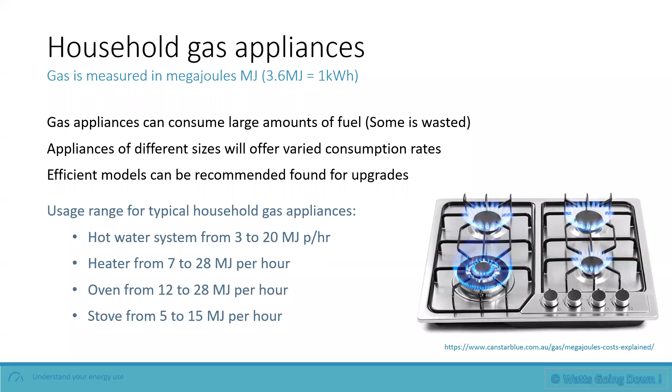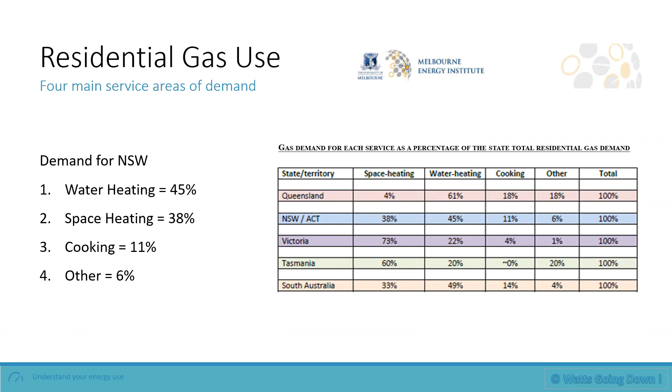When we look at the main energy use in homes, what the breakdown is cost-wise, for instance, if you're using gas for numerous things, it tends to be in New South Wales about 45% of the energy being used in homes for gas is for water heating, about 38% gas used for space heating, 11% for cooking, and 6% for others.

So my advice is if you're going to make a bit of an effort to try and be energy efficient, part of what you can do is to actually jot down some of your energy use and start to work out which are the priorities, which are the things that are mostly going to be costing you money. So itemize some of those things and identify the things where there's the biggest saving.

Now, of course, pretty straightforward - you can change a really big appliance and there'll be some savings there. But if it's not something that you're able to change, or you can't afford to change, then you've got to be looking around and really having an idea of which are the ones that are costing you the most - that's a really good place to start.

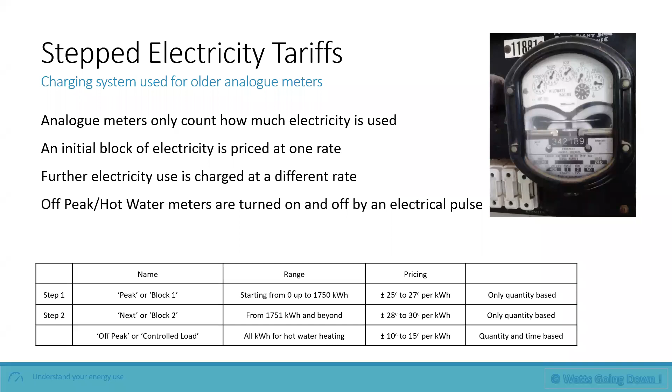But your actual electricity bill should tell you, and there'll be certain names given to the tariffs. Often peak or block 1, and next or block 2, is what's used on those simple kind of tariffs under that simple charging system. But there's a more complicated system that's come in since we've had digital meters, and it's a little more complicated - not greatly complicated.

So what happens is you've now got these digital meters. Sometimes they call them smart meters - often they're capable of being smart, but they're not really smart. They're just electronic meters rather than an analog meter. They do have the potential to record more information. So what they do is not only count electricity as it comes in, they're counting what time it's coming in and what time it's starting and stopping, that kind of thing.

The reason being is that all across Australia, we have a particular energy cycle from one day to the next. For domestic homes, there's a bit of a rise in the mornings as people get up and get ready for school and work. It dips down a little in the middle of the day, and then it rises again in the evening around dinner time, and then it drops off again by about 10 o'clock at night.

So the electricity companies, now that they're all privatized, buy their electricity off the wholesale market. And at some times of the day, the market price of electricity is very high. So rather than averaging out all the electricity and just charging you one or two blocks, these time of use tariffs have come in, because the energy companies are gradually going to move those higher cost periods onto us as consumers. And that's what's going on.

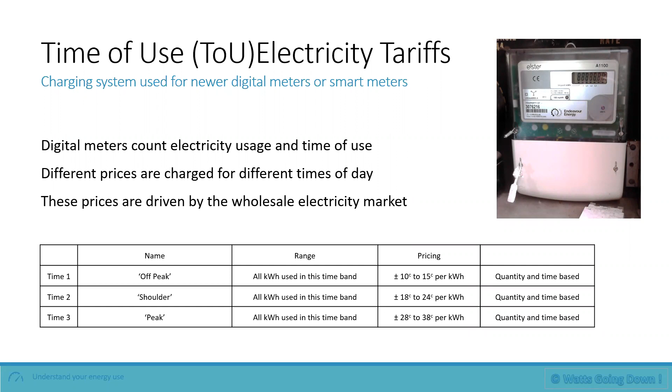But that period where we get home at the end of the day and then start to fire up our cooking and prepare for the next day, that's when the energy demand is at its highest in the electricity market. And so that's when the prices are high.

It's worth having a look at your retailer and your bill to work out what type of tariffs you're on. Are you on the standard block tariffs, or are you on time of use tariffs?

The NMI is the National Metering Identifier. It's like an address for your electricity, recorded as a unique electricity address number. So if you're going to change from one company to another, they need that number.

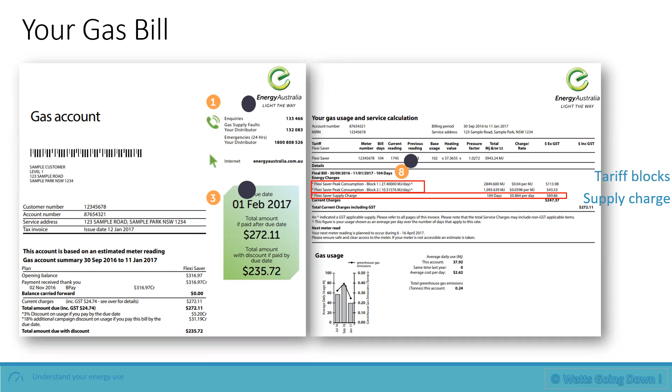There's a number of tariff blocks. Some companies that are retailing gas will reward you for using more, others will penalize you for using more. It just depends on who you've signed up with. It's sold based on the number of megajoules that you use over a billing period.

MIRN is the ID of a particular number for your meter, and that's the number you'd need if you're going to change your supply with someone else. And again, billing period - in this instance, 30th September all the way through to the 11th of January, a fairly lengthy period, 104 days.

Again, average usage - that's the figure I'm really interested in, how much you actually are using on average over that quarter. And of course, we would expect there to be a big difference from summer to winter. We take longer showers in winter and use more hot water. If it's cold, we're going to be running a gas heater more frequently.

There's nothing like cooking up a big warm dinner on a winter's evening compared to summer, where you might just want something light, maybe an extra drink and a bit of salad. There's a lot more energy used when it comes to gas in the winter months.

And then there's also plan names - what do they actually describe about the plan you're on? So all those things are on the bill, including discounts. It is kind of worth your while spending a bit of time getting to know them. I've looked at these for a long time, electricity bills, but I've got to say there are times where I'm bamboozled by things, especially when they change the tariffs and they change the names.

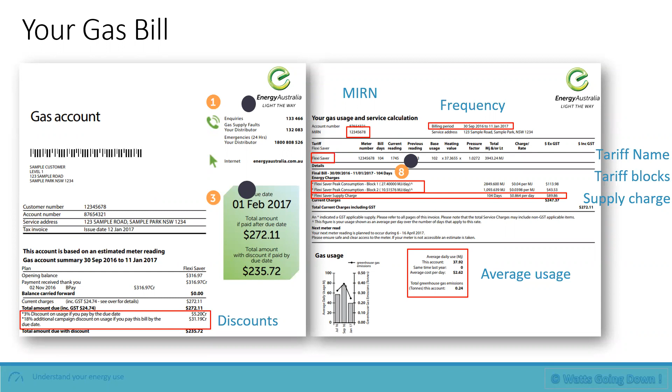But it is beneficial when you're renting to really keep a bit of a track on your energy use. There's a great tool when it comes to looking around for the best energy plan, and it really is the only tool I would recommend to you. This is a government website, it's called Energy Made Easy.

You need some information off your electricity bills, like your average usage is really good information, your postcode, those kind of things. You can look up electricity, you can look up gas, you can look up a combination of the two bundled together.

My advice is, if you've been with the same company for a long time, you really want to be keeping them on their toes, so shop around regularly. Otherwise, they'll hang on to you as a customer and the prices continue to jack up. Shop around, move from company to company if you get a better deal.

And this website enables you to actually search through a series of plans. Once you look through those plans, you'll be able to actually see what plan you're on, and you'll see what other plans are available to you, which may be cheaper, or probably are going to be cheaper unless you've been doing this exercise regularly.

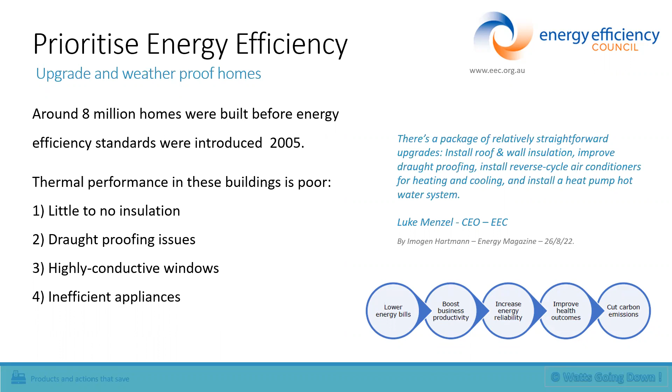So there's a package of things the Energy Efficiency Council recommends, which is about treating the home, draught proofing, and upgrading a whole bunch of appliances. Well, that's good, but there are simple things that you can do.

Skylight, vents, downlights, cracks around the window frames and the floor. There's lots of ways in which the energy that we pay for to either keep cool or keep warm is actually just seeping out through gaps and cracks. And so we reckon draught proofing is actually a really beneficial thing to look at.

That means the devices that you're paying for to put heat or cool into your home aren't going to have to run as hard. They reckon if you can make a bit of an effort, there can be some pretty significant savings, as much as 25 to 50% for average electricity use. You can save yourself $180 to $360 just by being really careful with this stuff. And for gas too, there's some pretty good savings.

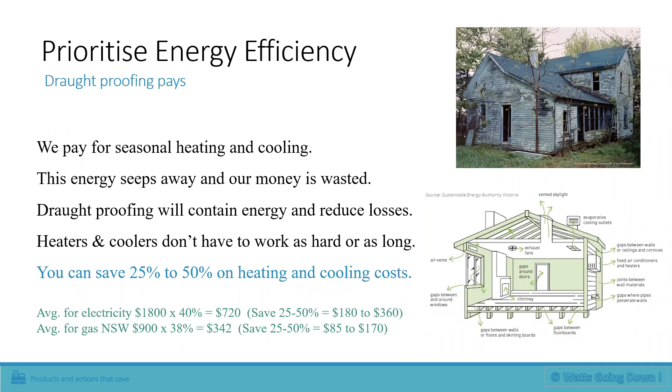So let's go down the path of seeing what are the main energy use areas that we use, particularly with electricity. Heating and cooling is the big player, 40%. Water heating, 23%, and that does change a little bit from place to place. These are just averages as determined by the energy rating website, a government website. Fridges and freezers now take position number 4, that used to be number 3.

Other appliances, we now have lots of gadgets in our home. There's ways that we can improve their performance. Lighting has stepped back a little bit, it used to be about 10%. Cooking sits around 5%, that's not a big use area but there's still some improvements to be made. And standby power, that used to be about 10% too. So we've seen some improvements.

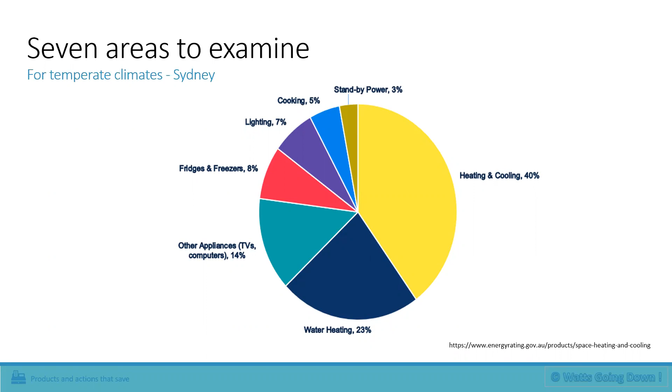But in today's homes, they just don't build those kind of vents into the walls. So my advice to you is block them off and manage the air by managing a window or a fan, or an exhaust fan or something. You don't really want a permanently leaky hole in the wall. What you want is a mechanism that you can control.

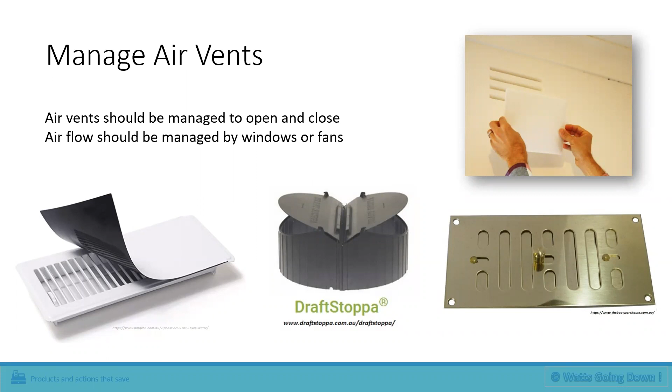And of course, there's a lovely shiny brass one there, just one of those wall plates. That particular image actually came from a boating shop. But you get the idea, there's a little slider along there so you can open and close the vent. So managing air vents is important.

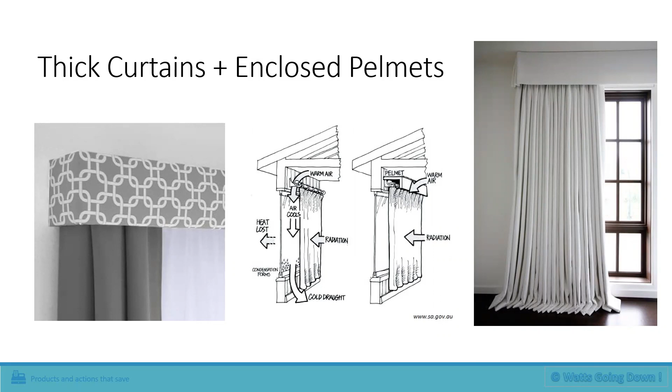This is probably a treatment you'd consider more in winter, or on a cold night. We do occasionally get a cold night, but we're experiencing the first serious amounts of spring, aren't we? Let's talk about something you might do to the glass.

If you've got windows that are taking in a lot of heat, you can use these kinds of temporary treatments. Some people use bubble wrap. What is bubble wrap? It's trapped pockets of air, and that's actually what insulation is. But you've got to really enjoy that funky look of having bubble wrap on your windows - it's not going to work for everyone, is it?

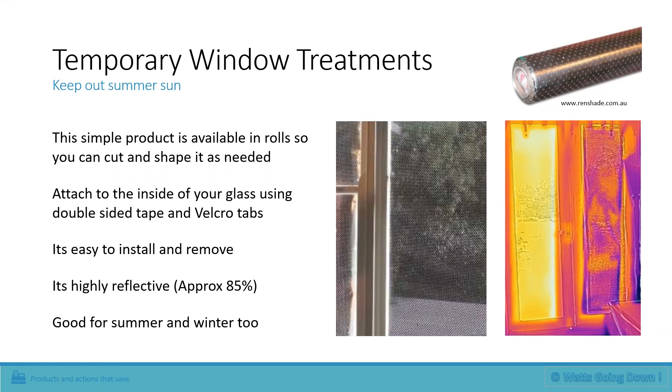So insofar as managing heat traveling into your home, without a doubt, treating the outside of your home with some sort of shading is the big success story. You can do a lot with curtains, but effectively the sunlight pours through the glass, heats the back of the curtain and it becomes a radiator. But if you can arrest that sun on the outside, then you're going to make an enormous difference to the amount of heat that's pouring in.

We tend to forget that the morning sun in summer has just as much energy in it as the afternoon sun in summer. So we don't tend to pay a lot of attention to the east-facing windows in our homes, but that's because the mornings tend to be a little cooler. It's been cooler overnight, a lot of heat's dissipated, and that sun starts baking up our houses on the east side. Throughout the middle of the day the sun's directly overhead, and in the afternoons the environment's hot, so we really notice that summer sun. But it's the same amount of energy pouring in morning and evening.

Every 1 square meter of glass represents the same energy as a 1 kilowatt heater. So if you've got a couple of windows facing east, then you're letting in a couple of kilowatts worth of heat when the sun's coming through them.

Now, there's a lot of products on the market, things that can be fastened to buildings, and that may or may not be possible when you're renting. But I've seen people who are quite innovative, who've gathered some secondhand fly screens and actually taken the fly screen mesh out of them and put shade cloth in their place, then fastened them onto the windows, saving the original mesh to put back up in the other months. That way they've got shade cloth fastened into the fly screen. I think that's really clever.

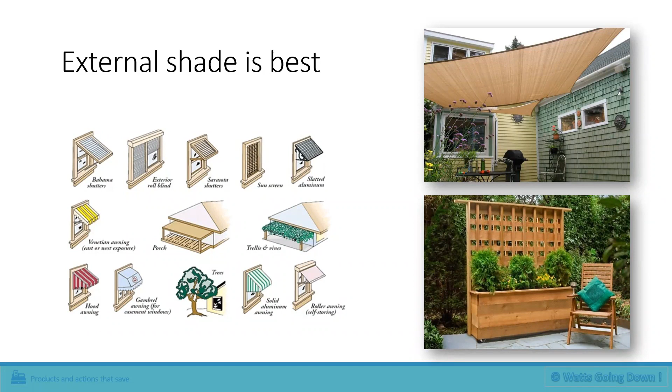And the other thing, I've got a picture down the bottom right-hand corner, showing that with a little bit of creative thinking, a garden planter with a bit of lattice at the back could act as a great way of stopping the sun from pouring into a window while still enabling you to see out. Perhaps you can even make good use of that little garden planter and put some, what are now expensive vegetables, tomatoes or beans or cucumbers, in your planter box, and make use of that sun, grow some vegetables as well as stop the sun from pouring into your house.

When we talk about gadgets or appliances that you might use, what we know across all the different devices is that the most efficient device you can put into a home for cooling is a reverse cycle air conditioner. Now, there are lots of little temporary, portable ones you can buy, but unfortunately they're not as efficient as the fixed split systems that are on the market now.

Compare that to something like a fan. Fans use a trivial amount of power by comparison. What actually happens when we get hot is that our bodies will put moisture on the surface of our skin, we perspire, and when air blows across the skin, that moisture evaporates away and that leaves our skin feeling cool. That's really what air conditioners do.

They kind of mimic that effect by extracting the moisture out of the air, so you dry out when you've got air conditioners. But air conditioners are great in that humid part of the year, and we've certainly had a couple of humid summers, haven't we, with all the mold and everything else that's come into our homes in the last couple of years. Supposedly we're expecting a bit more of that this year.

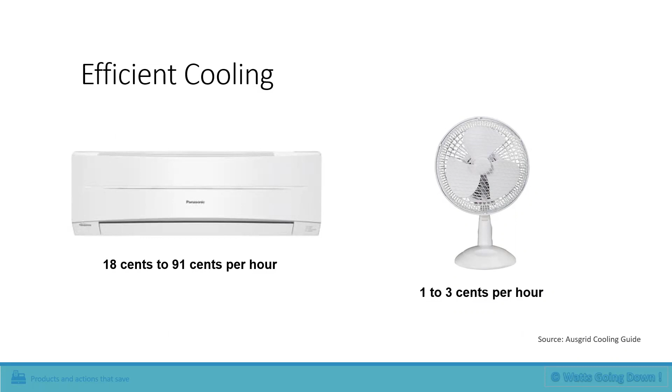There are some great simple heating habits you can use. The first one we call zoning, and that's just about closing off the rooms that you don't need. It's kind of common sense, isn't it? We're not using the spare bedroom, we're not using the bathroom or the laundry, so we just close those doors and treat the rooms that we do need to, either for heating or cooling. That works in both ends of the seasons.

Sometimes people get really innovative and install little curtain rods, systems you can put up into a doorway or hallway, so you can actually block rooms off and hang a curtain down. They're just little rods that you twist in your hands and they expand out until they meet the walls, holding steady to hold a curtain without necessarily doing any penetrations into the building. So that's an idea - closing the doors and only treating the rooms that you actually need to treat. The smaller the space you're treating, the less money you'll spend.

Temperatures are really, really important. These figures might seem counterintuitive - you might say, hang on, you got those numbers in the wrong place. Actually no, these are the recommended settings, and I'll explain why. We encourage you not to heat your house up too much in winter, 18 to 21 degrees. By the time you get to 21 degrees, that's pretty comfortable, yeah? 18 degrees might seem a little cool, but as winter progresses and our blood thickens up, you can actually afford to step your temperature setting down a degree, because your body's kind of acclimatizing to the winter.

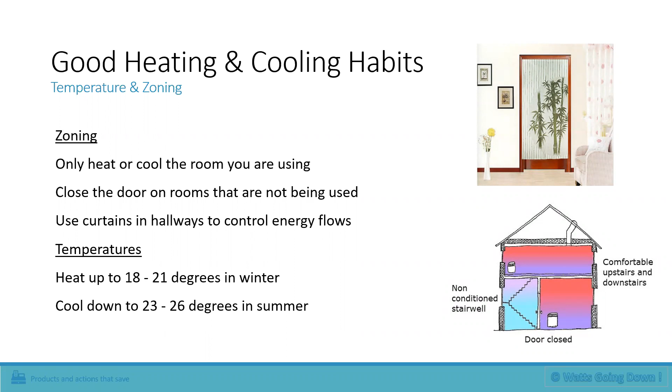So it's worthwhile to really look at those temperatures. Now, it's not a prescription, and everybody and their bodies and their needs are different. But that's the recommended advice, and you just work out what range is good for you. Of course, if you can manage it, changing it by 1 degree is going to help.

I'll quickly just step through the heaters. We're moving away from the heating season, aren't we? There's a lot of different heaters on the market - electric heaters of various types, whether they've got oil-filled column heaters, or just plain fan heaters or plain old radiant heaters, or whether it's a heater that has a fan in it but basically just got a halogen sort of heating element.

Those heaters on the left tend to be pretty expensive to run. When you look at the 3 on the right, up the top is a gas heater. Now gas is going up, so that's becoming more expensive than probably what these figures are really telling us. Below that is ducted air conditioning, about 28 cents an hour, but the split system reverse cycle air conditioners are about 18 cents per hour for a small split system. So aircon, again, is the best way to heat a home - that's the most efficient way to do so.

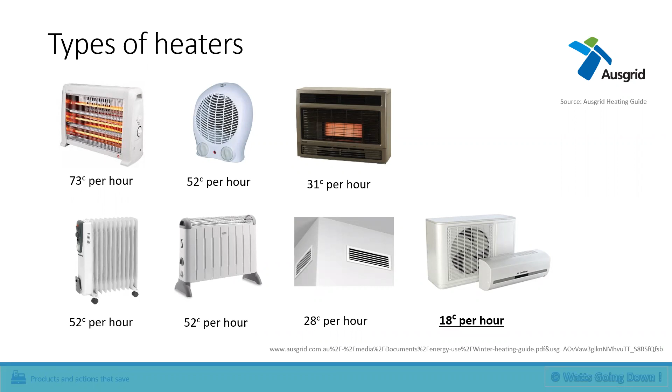Basically, the air conditioning market has really improved in the performance of the devices, so they've made them a lot more efficient. They make the compressors variable speed, they use better gases, the heat exchangers in them are better. So it's efficient for cooling, efficient for heating, and efficient over time cost-wise. They're a good device these days, and the numbers speak for themselves.

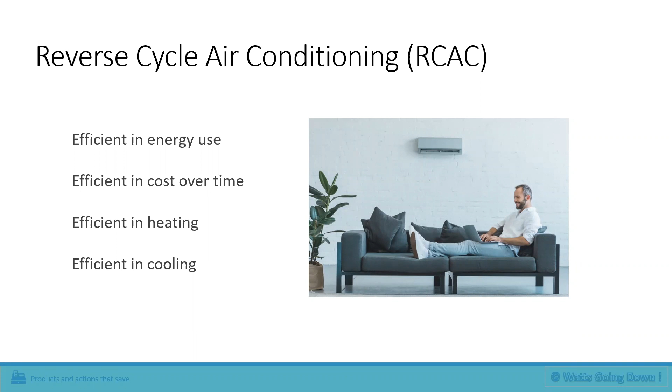When you're actually looking at air conditioning, some of the things I've already leaned on: insulation and draft proofing - the idea that you're just pouring energy into a room and then it's leaking away, that's not much chop, is it? They have star ratings - I'll talk about star ratings again in a little while - but you want to be aiming for a pretty high rating if you're going to go out and buy one.

Unfortunately, some of the little portable ones that hit the market this time of year tend to have a fairly low star rating, which means they're costing you quite a bit to run. It tends to be with the split systems - they're the most efficient compared to ducted, and the smaller split systems are really very efficient. So if you've got the opportunity to install an air conditioner, a small split one, then ideally just put it in the room that you need.

Also, installers can be quite creative about how they work, so they don't have to go in the most obvious place, and sometimes you can even put the external part up on a roof or something like that.

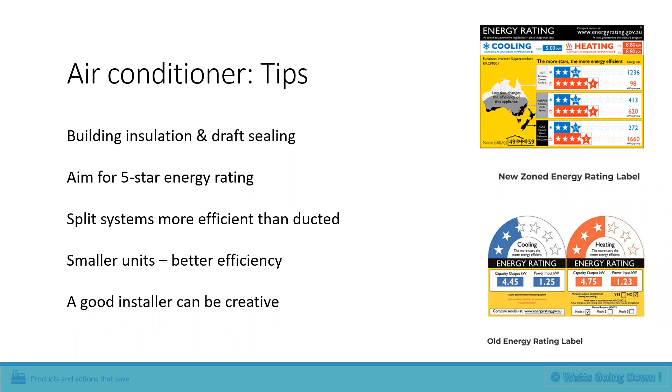Your washing machine probably has different temperature settings - try and go for a cold water wash.

I've been washing my clothes in cold water. Modern detergents and modern washing machines do a great job of washing in cold water.

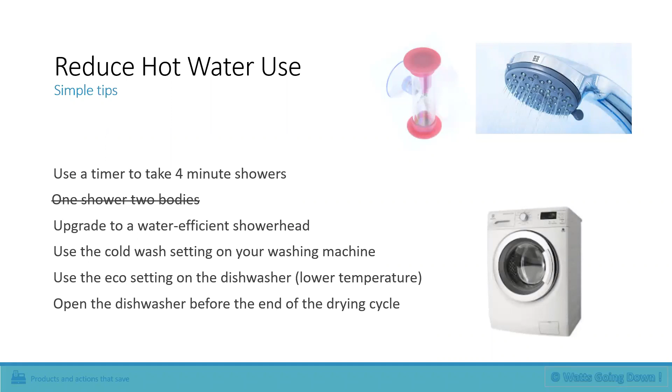There's also things like an eco setting on your dishwasher, which will change the temperature a little bit. You can sometimes open the dishwasher when it's going into the drying cycle and just let the moisture evaporate off rather than have steamy hot water run over the pots, plates, crockery, and cutlery. So to let it evaporate off that way, you just open the dishwasher before the cycle ends, at that last use of hot water.

If you're looking at the big appliance, the hot water system, there's a few different hot water systems out there on the market. If your hot water system is going or gone, it's really beneficial to be aware of what could replace it that's more efficient.

You can see from this chart that the classic old electric storage hot water system, designed to last about 10 years, is really power hungry. Gas storage is a bit over $1 a day, gas instantaneous about $1 a day. Solar with a gas backup is great, very cheap, but you're actually buying 2 hot water systems, and today the roof space is better used for photovoltaic panels rather than hot water systems. Solar with an electric backup is again sort of 2 systems in a way - not always, it's often just an electric element inside a solar hot water system.

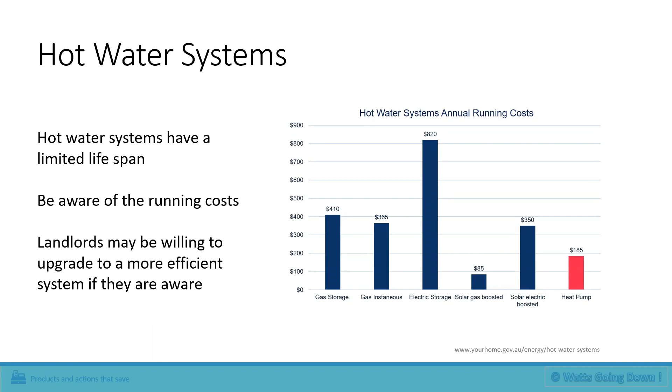But the more recent technology that's been around for about a decade and really matured is what we call heat pump hot water systems, and they are incredibly efficient by today's standards. They use something like a quarter of the energy of your classic old electric storage system. So if your hot water system is a bit older, and your landlord might be interested in or preparing to replace it, being aware of what's most efficient is worthwhile. Check out those heat pump hot water systems.

Appliances - I said I'd introduce you to the energy rating system in a little bit of detail. Basically, the energy rating system is run by the government, and it's about giving consumers good advice about energy efficiency.

I don't particularly subscribe to the idea that you just throw something away and get a newer one, unless there's really good cause to do so. A really old fridge might still be working after 20 years - classic old fridge with a big noisy compressor. I've been into homes where I've heard them running from the minute I walk in to the minute I leave. We made equipment very well and sturdy in the old days because electricity was pretty cheap, but in today's world, modern appliances are much more efficient.

So you want to come to a website like this when it's time to replace larger appliances - your white goods, fridges, computers, washers, dishwashers, air conditioners, dryers. All these appliances have energy rating stickers, and the idea is you want to get the highest rating that you can. Sometimes it's a little confusing - you'll end up at the shop and there's a 2.5 star and a 3 star, and you think, that's not a lot of difference. But in fact, over the life of the product, it definitely is.

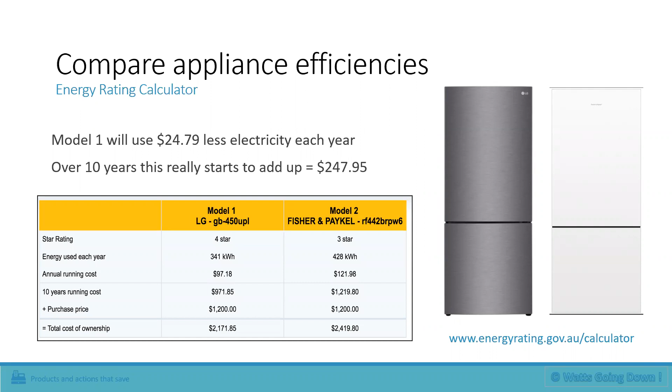Open the fridge door, put the page halfway in, close the door so the page is half in the fridge and half out, then pull on that page. If it slides out without resistance, your fridge seals are starting to go. If it's a little tight and you have to tug on the paper a little, puts up some resistance, then that fridge seal is still working. Just work your way around the fridge door. That's a good thing to check.

You can actually have fridge seals replaced. There's a bunch of little magnets in the rubber seal, and over time, the magnets just lose their grip. That's what happens. The other important thing is setting the temperature.

Just put a thermometer in the fridge and leave it there for a few hours. 3 to 4 degrees is the right temperature for fridges, and -15 to -18 is the right temperature for freezers.

Also, just being sensible, wherever possible, is there a smaller appliance you can run to do the job? Microwaves are pretty efficient, so that's another option. Rather than heating up a whole oven, can you microwave that particular dish? Not necessarily going to work for every dish, but there are some things.

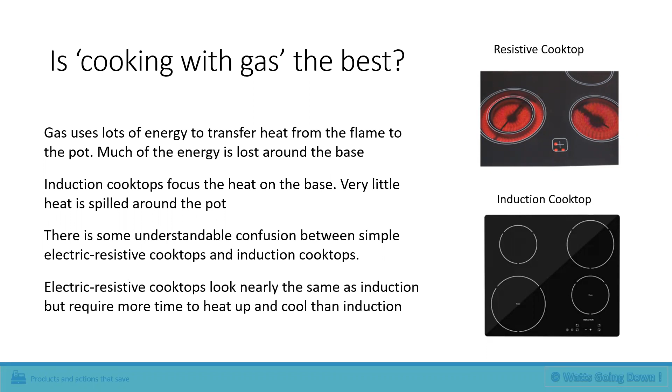It actually works by making an induction field that puts energy directly into your pot. Your pot becomes the element. They look fairly similar to some of the others, but there's some great benefits to them. The magnetic induction field makes your pot the element, and as a result, you've not got all that energy being lost up the sides.

They're very responsive, like gas. They heat up quickly, they turn off quickly. They're really safe too. Put your hand on it, it's not going to burn you. If the pot's just been there and the surface is warm, sure, but it's not the same as your old classic resistive elements that are baking hot. It operates differently because it needs the magnetic field to send the power through.

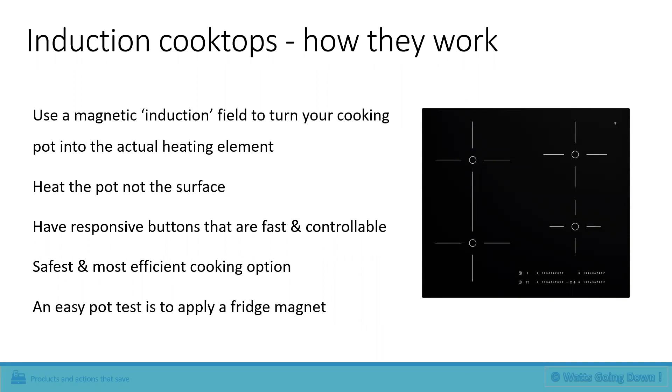There's an easy test - you just put a magnet on your pots to see if they're the right type to work with an induction cooktop. Now, you might say, hey mate, I'm in a rented house, I can't change the cooktop. Correct, I understand that. But there are little benchtop ones that you can buy, singles or dual element ones. I've got one at my place, and they're really great.

For me, I live in, as you heard earlier, an off-grid home, and we run off solar and batteries. So during the day, we can use our induction cooktop. Unfortunately at night, my batteries can't really afford those larger power usage, so we go back to gas in our circumstance. But I'm hoping in time, when I get a new battery bank, I'll be moving on to all induction cooking. If the only gas appliance in your home is a cooktop, one of these induction cooktops, a portable one, a benchtop one, might be a good answer for you, because it means you can maybe turn off the gas, eliminate gas usage altogether.

There are also some issues with the fumes that come off gas, and the Medical Journal of Australia research shows that a significant number of children under the age of 14 are affected with asthma, and it's closely related to homes that are damp and have gas stoves. So there's some health effects there, isn't there?

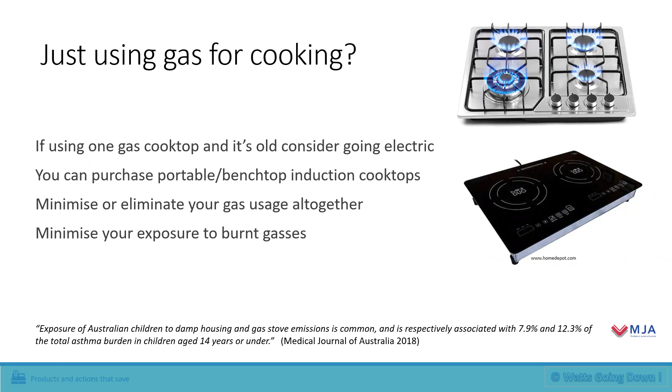Dozens of devices, computers and monitors and printers and routers and TVs and DVDs. Look, it's a massive list, I'm not going to read them all out. It's interesting, there's a lot of devices that we don't realize are using power even when they're turned off.

My washing machine, for instance, my old Fisher and Paykel washing machine - when I'd finished with the cycle, it used to do this lovely little chime, and then it would appear to turn off. All the lights would go out and the cycle was finished. I put a meter on it and discovered it was using 15 watts of power, just waiting for me to walk up and press a button again.

So there are a lot of devices that we own in our homes that are sort of operating like that with standby power. A lot of new stuff actually doesn't use much in the way of standby power, but there's some simple ways that you can fix that.

Then you've got a remote control that can turn that power point off. So if you've got one of those hard to reach things, like maybe the washing machine's hard to reach, or the microwave, or where all the TV and computing gear's connected up, you want to turn that stuff off at night when you go to bed or when it's not being used. Then you can just pick up your remote, press the button, and the whole power point goes off.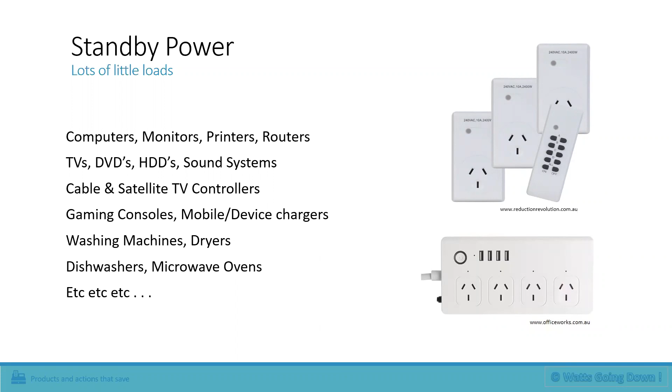So there's all sorts of handy little ways that you can turn off those standby loads. But if you're someone who's a little bit organized, you can just simply go around, reach down and flick the switch, turn them off at the power point.

We've got a lot of new automation gadgets. There's a great world of technology rolling in for us now to help us manage our appliances and our electricity use in our home. So there's a couple here that I'll list.

Sensibo is a little gadget - you buy this little hub, this clever device, put it in your room, and it gives you a fantastic amount of control using your mobile phone over your air conditioner. That's something you can retrofit to existing air conditioners so you get a really great level of control, and you can operate it not just at home. It's connected to the internet through your router, so you can operate it elsewhere.

So if you're out for the day and you're on your way back home, and you want to say, I'm going to cool the house down before I get home, you can do that through a gadget.

And the classic is that oil column heater. People turn them on, and then you walk past them a few days later, you go, oh, this is still on, when did I turn that on? Was that yesterday? No, not yesterday. Was it Monday? Oh no, it was last Wednesday. You know what I mean?

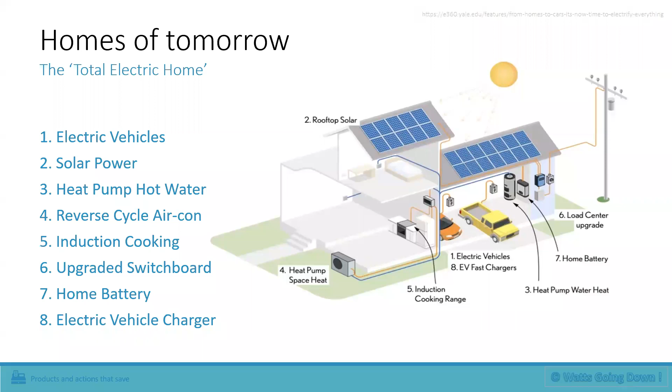What would I encourage you to do? How would I encourage you to step forward or step up, or follow the yellow brick road, whatever it might be? My advice to you is a little bit of measurement. So itemize and learn a bit about your energy use in your home, and work out what are the running costs of the main appliances that you use. Where are the largest savings? Where can you save by changing out or altering your behavior with those?

Altering behavior is pretty straightforward, that's a good way to change. But if you get the opportunity to change out some of those appliances - if the fridge is starting to fail, it's time to go buy a new fridge, great, now's your opportunity to buy a really efficient one. What is the age of the appliance? That will make a difference. I don't believe you should throw something away if it works. My goal is to just encourage you to upgrade to the best when you need it.

And of course, the final factor that's really going to curtail what you can and can't do is your budget. The budget's going to make some decisions for you. But for some people, it's actually about doing the small things that you can change.

Maybe it's just changing the light globes now and seeing small savings there. Maybe it's buying one of those little portable induction cooktops and moving off the gas a little. Maybe it's buying a couple of efficient fans and making the most of those - try to avoid the really cheap ones, you see them on council pickups quite regularly out on people's footpaths. But fans are really good, fans first, then the air conditioner, that kind of thing. Start small, enjoy some savings, and then let it grow.

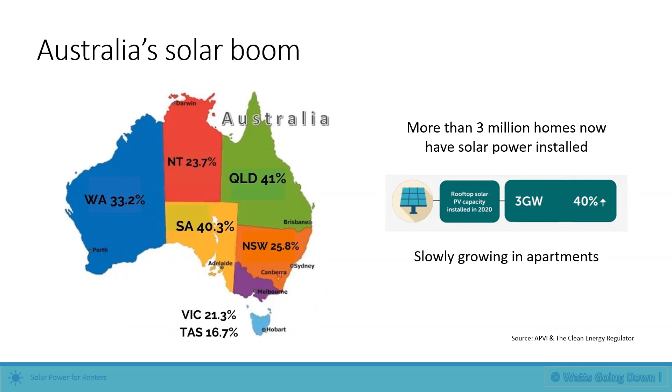When it comes to rooftop solar, in the Sydney region, solar power will pay for itself. The whole installation will pay for itself in as little as 3 to 5 years. There's a range there because it depends on how much of the energy you produce you use each day. If you really make the most of it and use the energy you produce, then it pays itself off quicker. The great thing is, of course, you're generating your own fuel. You make your own fuel, and it's great.

As an investment on properties, owners may be interested because the Real Estate Institute of Australia will tell you that properties with photovoltaic systems and battery systems are really desirable in the market. And the other great thing is, of course, a happy tenant is a good outcome for a landlord. So that's another persuasive argument.

It really counts if you're prepared to make some sort of contribution towards these larger expenses if you're asking a landlord to do it. So if you know your electricity bills are going to be a lot cheaper in the future, especially if you're in a long-term lease, then it might be a good idea to contribute. If it means you're going to get something that makes savings over the long term, then it's a good option.

If you're going to consider going down that path and finding out a bit more about it, can I just advise you straight up: don't make the mistake of recommending to your landlord the cheapest system on the market. There are some really cheap systems, and what they are is often poorer quality equipment compared to what you should be buying, considering it's an investment that will pay for itself in a fairly short time frame.

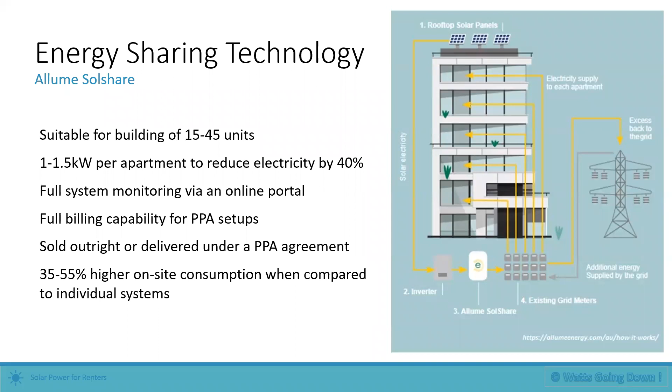There are also power purchase agreements, which are just a way in which electricity can be sold back into the market. The great thing about these is there's greater energy use compared to someone who's put a little solar system up on an apartment just for themselves. Shared power with one of these shared power management systems will see higher energy consumption per apartment. So that's a really good outcome.

There are some upgrades too to the legislation that covers strata. The Strata Schemes Management Amendment Bill of 2021 included sustainable infrastructure, things like energy efficiency for energy consumption, efficiency for water consumption, reducing greenhouse gas emissions, and electric charging for vehicles. Those updates have come in pretty recently, which shows that the legislation is starting to follow what the market wants.

If you're going through that process, there's a couple of steps to step through. Decide on the projects, get some other people on side, contact your owners corporation, committee, or the manager to understand the approval process, engage the neighbours, and get yourself some quotes.

You want to draft a bit of a motion and get that put on the agenda for the next meeting and make the case. Again, a bit of a business proposal, but strata has its own sort of levels of complexity, so there's just a bit of a process to step through there.

If you want to find out about that, there's a few good resources. The Department of Fair Trading has a guide about strata living, and Strata Community Association is a national body, but they have a New South Wales office, and there's some good information there - a guide to common property and how to go about making proposals, whether it's hot water systems or solar power systems. Even if you're in an apartment, it can be done.

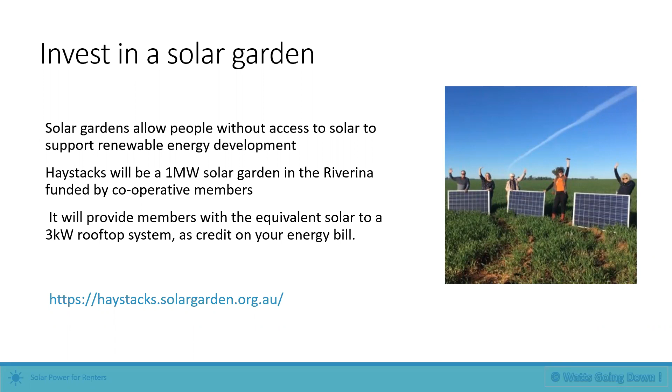Haystacks is an example. It's really great. There's a lot of grassroots kind of organisations that are trying to really promote those sustainable energy options for people. And of course, one of the great ways that you can save energy is by buying yourself an electric car, if you can afford one, or if you can get one that's available.

But there are a few services, and we're seeing some great change that's come from the recent federal government. We're seeing some pricing and some investments. We've got state government incentives as well - there's a $3,000 rebate, but that's sort of for buying new EVs, and they're pretty expensive.

You can also change around the times that you might charge up an electric vehicle. When we compare the running costs of electric vehicles to fuel-based vehicles - meaning fossil fuels, gas or petrol or diesel - you've still got to pay for tyres, you've got to do a little bit of servicing, but the actual running costs are so much cheaper. We've already gone past the point where, over the lifetime of the vehicle including fuel, the electric vehicle is the most affordable option.

So we'd like to see more come into Australia, like there's going through Europe and through America. There are some organisations like the Good Car Company. They started in Tasmania, but they actually run programs to help bring in second-hand ones from Japan and the UK, and they do a battery test on them and give them a little warranty. So electric vehicles - we will see a flood of those in the years to come.